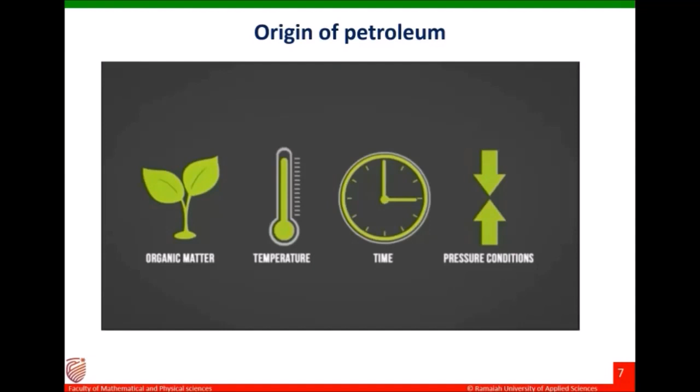There are 3 types of major fossil fuels: coal, oil, and natural gas. Coal is formed from the ferns, plants, and trees which hardened due to pressure and heat. Oil was formed from small organisms like zooplankton and algae, where pressure caused the more complex organic matter to decompose. Natural gas was formed by the same process as oil but was only exposed to more pressure and heat, causing it to further decompose and turn into gaseous form.

At the molecular level, oil and gas are the hydrocarbons made up of hydrogen and carbon atoms. The constant pressure and movement of the Earth's crust squeezes the oil and gas through the pores or spaces within the rocks. Some oil and gas reaches the Earth's surface and seeps out naturally into land or water. Often, it is trapped beneath the surface by impermeable layers of rock structures like rock faults.

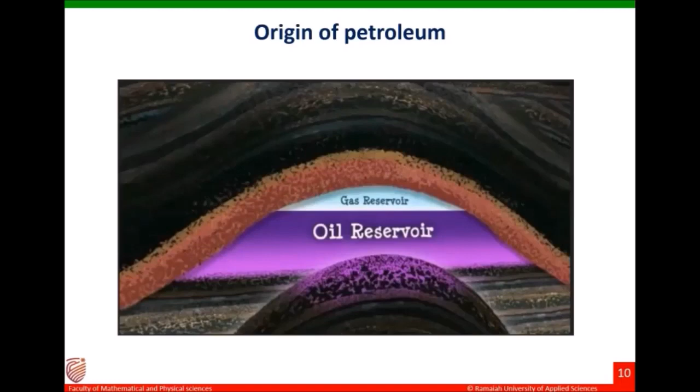Within the crust, oil or gas deposits build up and form reservoirs. Reservoirs are like vast sponges filled with oil and gas. They can be as large as a city. To find oil and gas deposits, geologists use a number of different survey techniques, including seismic surveys, gravitational surveys, and geological mapping. Seismic surveys use reflected sound waves to produce a 3-dimensional view of the Earth's interior.

New technologies such as 4-dimensional projections and sophisticated graphic renderings of rock structures are improving the way we find conventional oil and gas deposits. Energy resources that are currently difficult or expensive to extract are called unconventional oil and gas.

Oil has become the most important source of energy since the mid-1950s and became the lifeblood of the industrialized nations. Its products underpin modern society, mainly supplying energy to power industry, heat homes, and provide fuel for vehicles and aeroplanes to carry goods and people all over the world. In addition, it also benefits our lives in being vital to the production of many everyday essentials.

Oil's refined products are used to manufacture almost all chemical products, such as plastics, fertilizers, detergents, paints, and even medicines, plus a whole host of other products that you might not expect. Petroleum is the raw material for fuels such as petroleum gas, gasoline or petrol, naphtha, kerosene, diesel, fuel oil or heavy oils. Petroleum is also used to make useful petrochemicals such as benzene, toluene, other organic solvents, fertilizers, adhesives, pesticides, plastics, bitumen, petroleum wax, lubricating oil, etc.

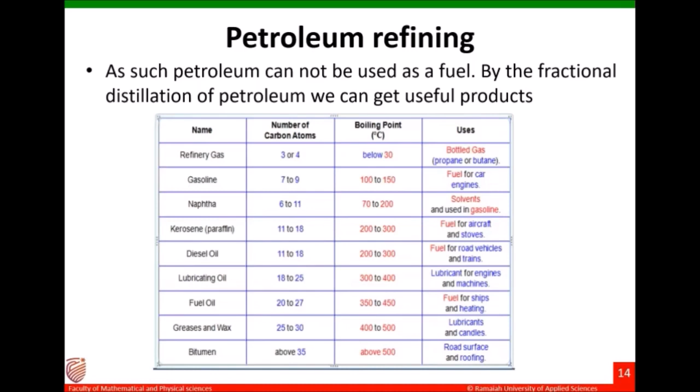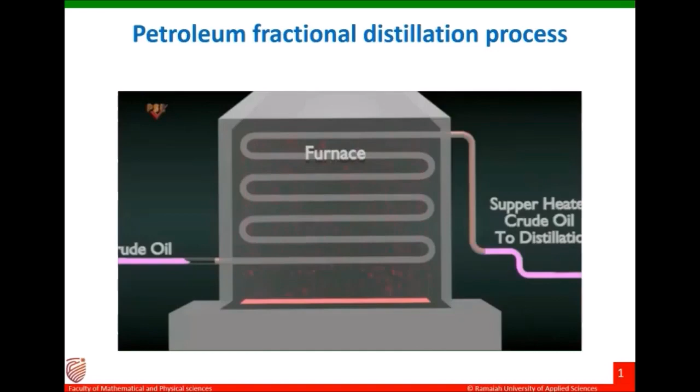To simplify the petroleum distillation process, we consider one distillation tower in which the distillation process takes place. Crude oil is supplied to a furnace where it is heated before adding it into the distillation tower. The heated mixture is fed into the bottom section of the distillation tower. This bottom section is the hottest point in the distillation tower, where the temperature can reach as high as 400 degrees Celsius. Components which are not vaporizable at this temperature become the bottom products.

Components in vapor form rise up the tower through a series of distillation stages. The temperature decreases as the vapors rise through the tower and the components condense. The products obtained from each distillation zone are known as product streams. Products from the distillation range from gases at the top to very highly viscous liquids at the bottom. In all cases, these product streams are considered unfinished products and further processing is required to make them useful products.

Light products separated at the top contain propane, butane and isobutane. This stream is also known as petroleum gas and it can be liquefied to produce liquefied petroleum gas or LPG. The gasoline stream is used as a good fuel for automobiles. The naphtha stream can be converted to gasoline by the reforming process. We will discuss the reforming process in the next video.

Kerosene can be treated to obtain jet fuels. Heavier oils such as fuel oil can be converted into useful fuels by cracking techniques. We will study cracking techniques in the next video. The process depends on the quality of the petroleum as well as market demands. The lower products, asphalt or bitumen, are used for construction.

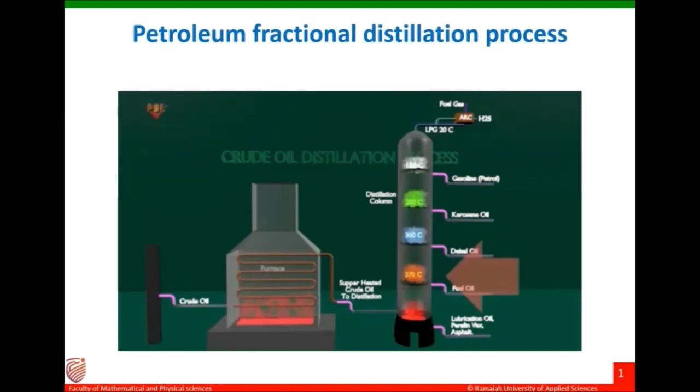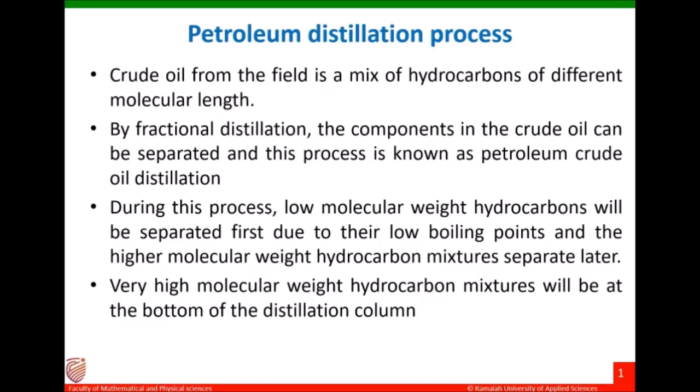Now we will summarize the petroleum distillation process. Crude oil from the field is a mix of hydrocarbons of different molecular lengths. By fractional distillation, the components in the crude oil can be separated, and this process is known as petroleum distillation. During this process, low molecular weight hydrocarbons will be separated first due to their low boiling points, and the higher molecular weight hydrocarbon mixtures separate later. Very high molecular weight hydrocarbon mixtures will be at the bottom of the distillation column.

Now we will summarize the video. In this video, the following questions were answered. How was crude oil formed in Earth's crust? What is the significance of petroleum in the present scenario? What is the composition of petroleum? What is the principle behind the separation of useful products from petroleum? Explain the petroleum distillation process. What are the products obtained from distillation of petroleum?

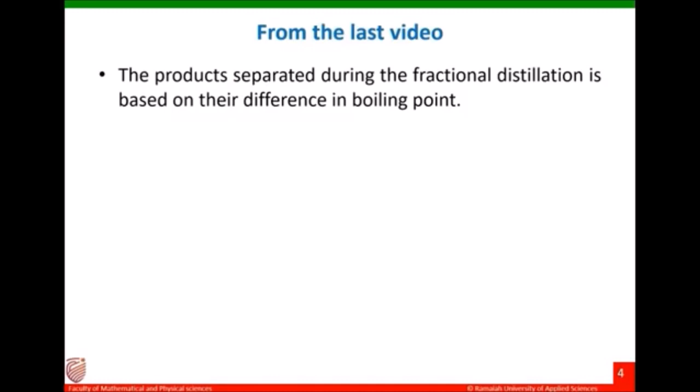The products separated during the fractional distillation process were based on their difference in boiling point. Lower molecular weight hydrocarbon based products separate at a lower temperature, for example refinery gas, petrol, etc. Higher molecular weight hydrocarbon based products are separated at higher temperatures, for example fuel oil, lubricating oil, etc. Very high molecular weight hydrocarbon based products will be at the bottom of the distillation column, and they won't vaporize in the column.

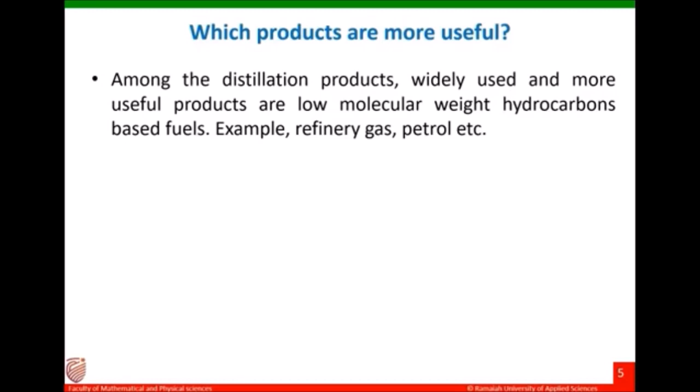For example, waxes, bitumen, etc. Among these fractional distillation products, which products are more useful? Widely used and more useful products are low molecular weight hydrocarbon based fuels, for example refinery gas, petrol, etc. Higher molecular weight hydrocarbon based products such as fuel oil do not have much commercial value. Higher molecular weight oils are also known as heavy oils.

Can we convert these less useful heavy oils into useful products? Yes, and that method is known as cracking of fuel. So the definition of cracking is this. Cracking is the breaking down of molecules with longer hydrocarbon chains into molecules with shorter hydrocarbon chains. This process you can achieve with the help of heat as well as catalyst.

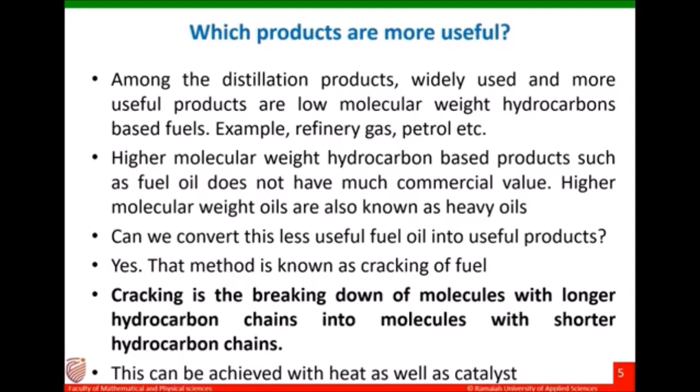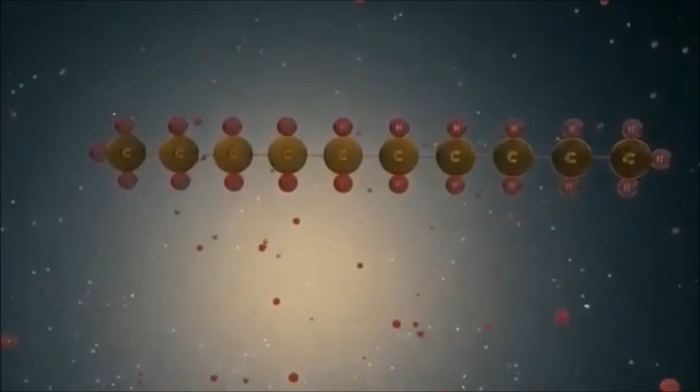The liquid is easily collected and separated by weight. The lighter and medium weight liquids require less processing before they're ready to be used in cars and trucks. The heavier liquids need more processing to become useful. A process called cracking is used to maximize the usefulness of heavy oil. Heavy oil has long strings of carbon and hydrogen molecules. Using a catalyst, these molecules can be broken into smaller chains, transforming the heavy oil into lighter, more valuable fluids.

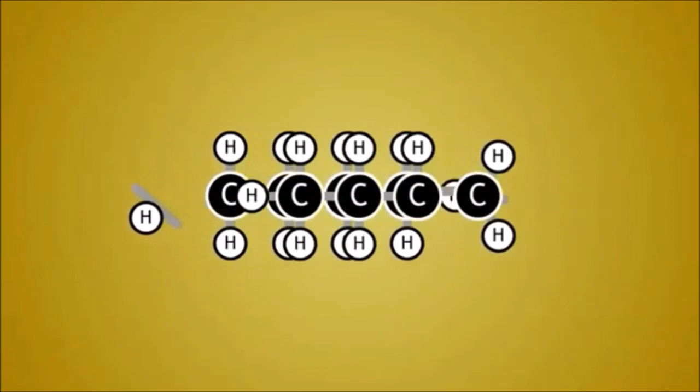We use a lot of fuels in our day-to-day lives, driving cars, aeroplanes, lorries, and even heating our homes. This means there is a very high demand for small-chain hydrocarbons. However, after fractional distillation, we find that we have a large supply of long-chain molecules. The process of cracking breaks down long-chain alkanes into a smaller alkane and alkene molecule.

This allows the supply of short-chain hydrocarbons to meet the demand for them, as the longer-chain alkanes are broken down into shorter alkanes and an alkene. The alkenes are also useful as these can be used in the manufacture of plastics. Here is an equation showing that C12H26 is broken down into octane and butene.

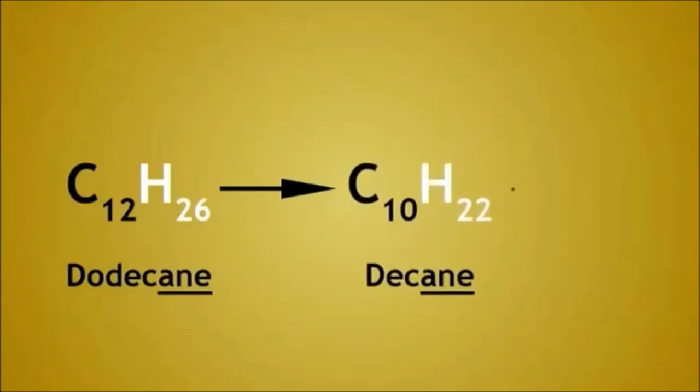There isn't a set way that these molecules are broken down. In fact, C12H26 could also be broken down into decane and ethene, or even butene, pentane and propene, as these equations show. The large hydrocarbon is broken down in quite a random way. Just note that in each equation, of course, since we had 12 carbon atoms and 26 hydrogens going into the reaction, the same must come out.

Types of cracking. Cracking can be done with the help of heat, and that type of cracking is known as thermal cracking. Thermal cracking can be done in two different ways: liquid phase cracking and vapor phase cracking. Cracking can also be done with the help of a catalyst, which is known as catalytic cracking. Catalytic cracking can also be done in two different ways: fixed bed catalytic cracking and fluidized bed catalytic cracking. So cracking can be done in two different ways: thermal cracking and catalytic cracking.

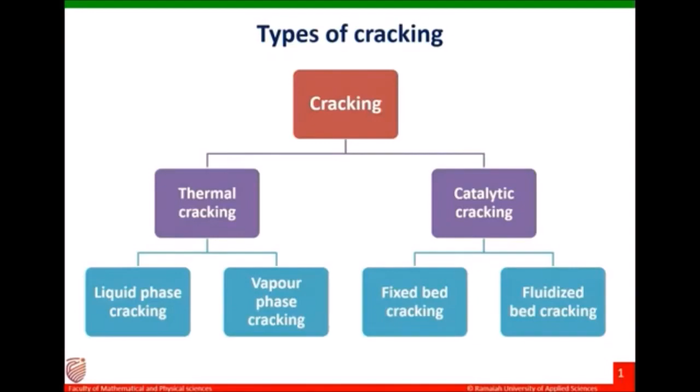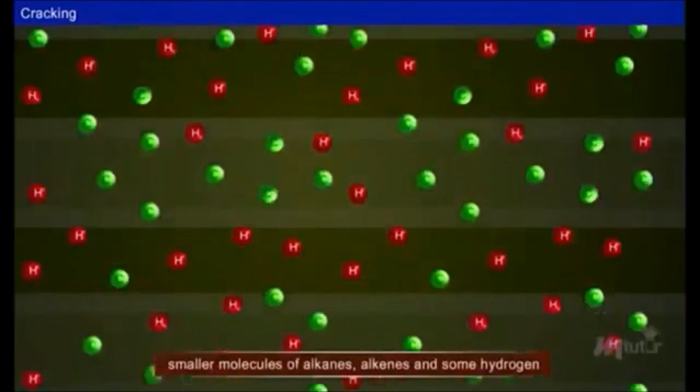There are two methods of cracking in use, thermal cracking and catalytic cracking. Thermal cracking. Cracking that is carried out by the application of heat and pressure is known as thermal cracking. Here, the bigger hydrocarbon molecules break down to give smaller molecules of alkanes, alkenes, and some hydrogen. This process may be carried out either in liquid phase or vapor phase.

Liquid phase thermal cracking. The heavy oil is cracked at a temperature of 475 to 530 degrees Celsius and pressure of about 100 kilograms per square centimeter. The cracked products are then separated in a fractionating column. Vapor phase thermal cracking. This type of cracking is suitable for oils which may be readily vaporized. The crude oil is first vaporized and then cracked at about 600 to 650 degrees Celsius under a low pressure of 10 to 20 kilograms per square centimeter.

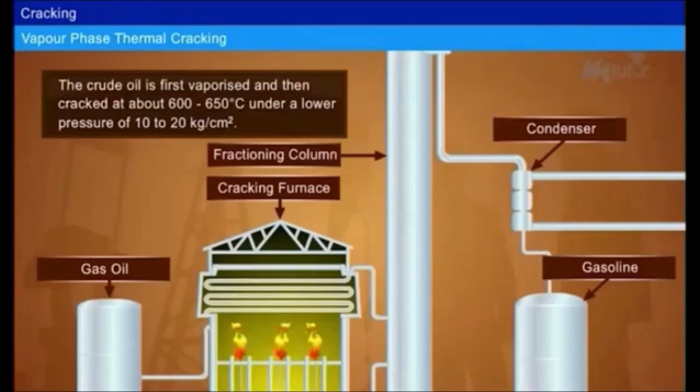Thermal cracking can be done in two ways: liquid phase thermal cracking and vapor phase thermal cracking. In liquid phase thermal cracking, heavy oil is pumped into the coil, kept at 420 to 550 degrees Celsius under a pressure of 15 to 100 kilograms per square centimeter. Here the pressure is quite high. Good quality gasoline is produced at this temperature. Gasoline with low octane value around 60 to 70 is obtained, which can be mixed with a higher octane value gasoline and then be used in automobiles. What is octane number? That we will study in the next video.

Vapor phase thermal cracking. Here the heavy oil is heated in a heater at 400 degrees Celsius to convert it into vapors. Then these vapors are passed into the reaction chamber, which is maintained at a temperature of 600 to 650 degrees Celsius under a pressure of 10 to 20 kilograms per square centimeter. Here you see the pressure is lower than that of liquid phase thermal cracking.

And the kind of petrol that we get is of high quality in vapor phase thermal cracking, where you can get an octane number up to 75 to 80. Catalytic cracking can be done in two ways: fixed bed and fluidized bed.

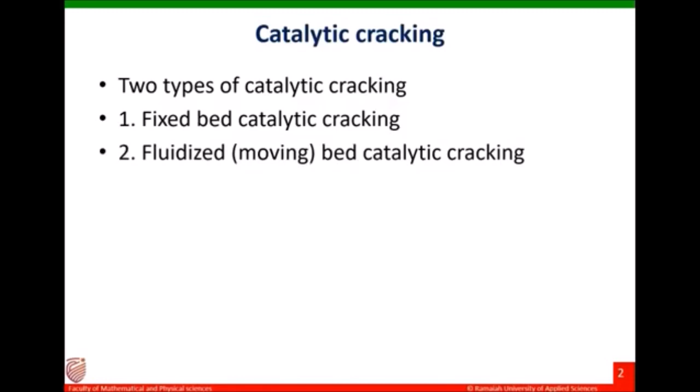In fixed bed catalytic cracking, you can see a catalyst chamber where there are beds where we have to put the catalyst. This catalyst will be fixed in that bed, and we have to pass the heated heavy oil. How can we heat it? With the help of an electric heater. Just heat it, and that heated oil should be passed to the catalyst chamber, where the catalyst molecules will be in touch, or they will be colliding with the heavy oil molecules, and the heavy oil molecules will be converted into lower molecular weight hydrocarbons, and those hydrocarbons we can separate using a small fractional distillation column. So we will get lower molecular weight hydrocarbons.

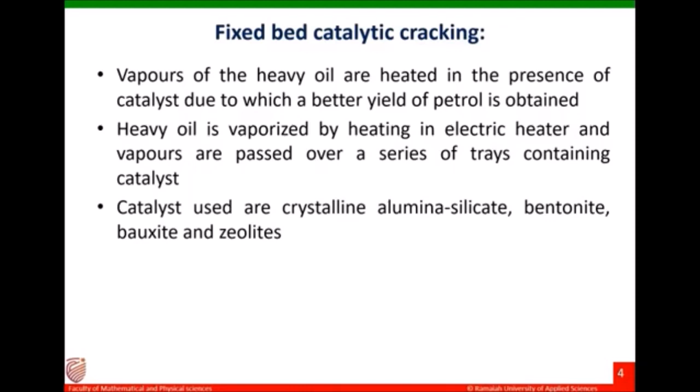So in fixed bed catalytic cracking, vapors of the heavy oil are heated in the presence of catalyst, due to which a better yield of petrol is obtained. Heavy oil is vaporized by heating in electric heater, and vapors are passed over a series of trays containing the catalyst, generally aluminum silicate, bentonite, bauxite, zeolite. And the reaction temperature will be somewhere around 425 to 540 degrees Celsius and a pressure of 1.5 kilogram per centimeter square.

In fluidized bed catalytic cracking, you can see a reaction chamber where catalyst will be suspended or moving with the help of an inert gas. So during this movement, heavy oil molecules will be in collision with the catalyst particles, and the number of collisions will be very high because of the movement of the catalyst. So the heavy oil molecules will be split into lower molecular weight hydrocarbons. These lower molecular weight hydrocarbons you can separate using a small fractional distillation column, where you can get lower molecular weight hydrocarbons separately.

So in the fluidized bed catalytic cracking, we have to supply heavy oil fraction, and the catalyst generally we use is aluminum oxide and silicon dioxide. They should be in finely powdered form. Temperature should be 550 degrees Celsius. Pressure 1 to 2 atmosphere. Time only 3 to 4 seconds. So for this process, the time required is only 3 to 4 seconds. That's why this fluidized bed catalytic cracking is now widely used in industries, mainly in the refineries. The production yield is around 70%.

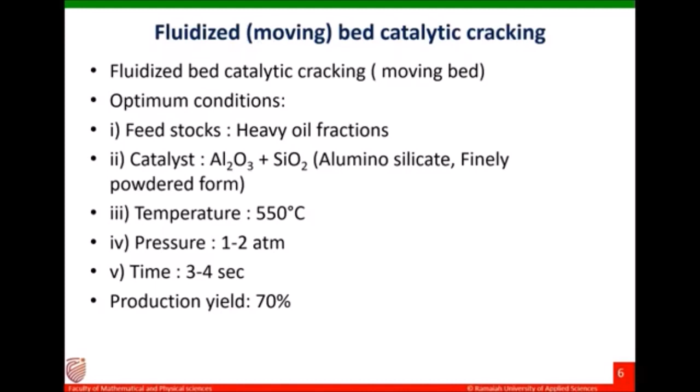So in this video we learned what is cracking, why it is necessary in petroleum industry, types of cracking and their characteristics.

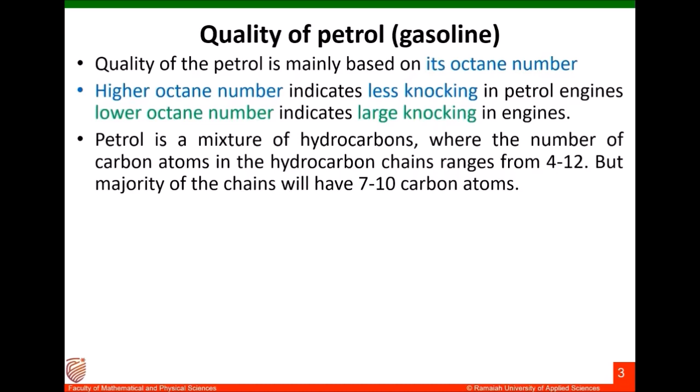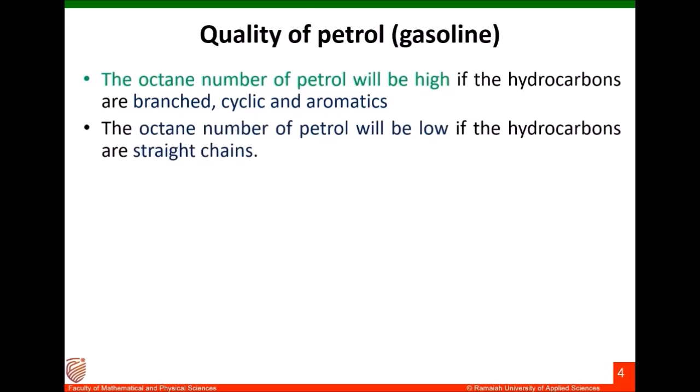The hydrocarbons present in petrol are paraffins or alkanes, olefins or alkenes, cycloalkanes, cycloalkenes, aromatic compounds, etc. Among these hydrocarbons, some compounds will be linear, some will be branched, some will be cyclic and aromatic. If the hydrocarbons in the petrol are majorly branched, cyclic and aromatic, then the octane number of petrol will be high. If the hydrocarbons in the petrol are straight linear chains, then the octane number of petrol will be low.

A significant amount of petroleum products such as naphtha contains mainly straight chain hydrocarbons. Similarly, the petrol obtained from petroleum also contains a significant amount of straight chain hydrocarbons. Straight chain hydrocarbons lead to lower octane number and more knocking. Knocking is a rattling sound in engines. How to increase the octane number? How to decrease the knocking in petrol engines? If we can convert these linear straight hydrocarbons into branched or cyclic hydrocarbons, octane number of the petrol will be increased, and this process is known as reforming process.

Definition of reforming: conversion of straight chain hydrocarbons into branched chain, cyclic and aromatic hydrocarbons, resulting in upgradation of petrol, that is improvement in octane number, is known as reforming. If the reforming is done in the presence of a catalyst, then the reforming is known as catalytic reforming. For example, linear hexane into cyclohexane.

Mainly 4 types of catalytic reforming processes are being used: isomerization reaction, hydrocracking, dehydrogenation reaction, dehydrocyclization reaction. First case, isomerization reaction for reforming. In this given example, the straight chain hydrocarbon, that is n-hexane, in the mixtures of hydrocarbons is converted into its branched isomers such as 2-methylpentane and 2,2-dimethylbutane.

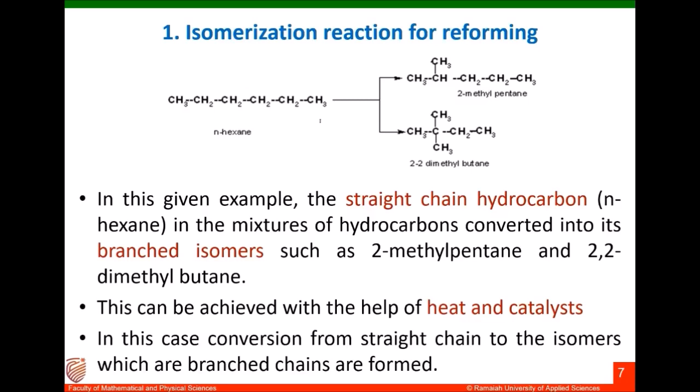Second, hydrocracking reforming. In hydrocracking reforming, in the presence of hydrogen, the straight chain hydrocarbons will be split into smaller hydrocarbons. The word hydrocracking came because of the usage of hydrogen for cracking the longer linear hydrocarbons into shorter hydrocarbons. For example, normal heptane with the help of hydrogen is cracked into smaller hydrocarbons such as propane and butane. Similarly, decane is cracked with the help of hydrogen to produce 2 smaller hydrocarbons of pentane.

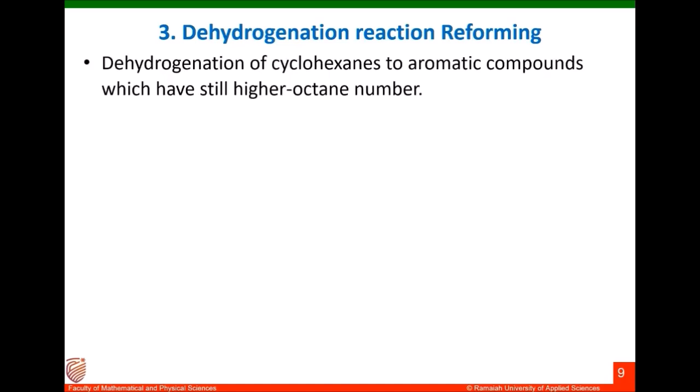The fourth technique, dehydrocyclization reforming process. Straight chain hydrocarbons undergo cyclization followed by dehydrogenation to produce aromatic hydrocarbons. So here 2 processes will be happening. One is dehydrogenation, that means hydrogen will be removed. At the same time, cyclization also will happen, and the product will be aromatic hydrocarbons.

Now we can conclude the reforming process. Reforming process is essential to produce high quality, high octane number petrol from the naphtha stream and low quality gasoline that we obtained from the fractional distillation of crude oil. By converting the straight chain hydrocarbons into branched, cyclic and aromatic hydrocarbons, octane number of fuel will be improved.

If there is something everyone can agree on, it's that cars can make weird noises. It could be a squeal, a clunk, or even a rumble and roar. If the sound is closer to a knock, you may be dealing with problems under the hood. Problems that could cause engine damage if left unresolved.

We know that the combustion of fuel in the engine generates energy for the vehicle. Fuel-air mixture will be compressed and undergo combustion and produce energy. However, at high compression ratios, depending on the composition of the fuel, premature combustion of part of the compressed air-fuel mixture in the cylinder produces intense high frequency pressure waves. These pressure waves force parts of the engine to vibrate, which produces an audible knock.

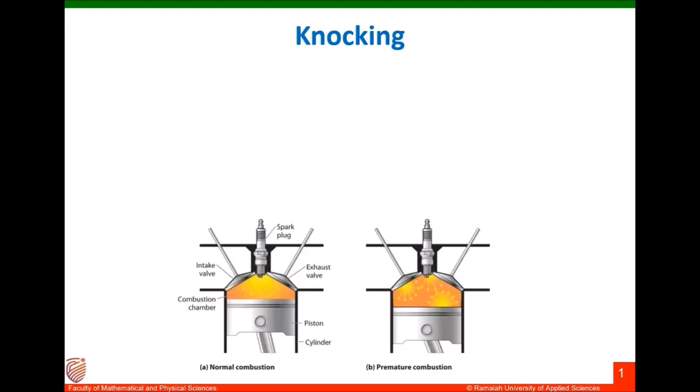Knocking may be defined as the production of a shock wave in an IC engine as a result of an explosive combustion of fuel-air mixture leading to a rattling sound. Knocking is caused by premature combustion of part of the compressed air-fuel mixture in the cylinder. Knocking is mainly due to the faulty spark of the engine, low octane fuel, and carbon deposits in the engine.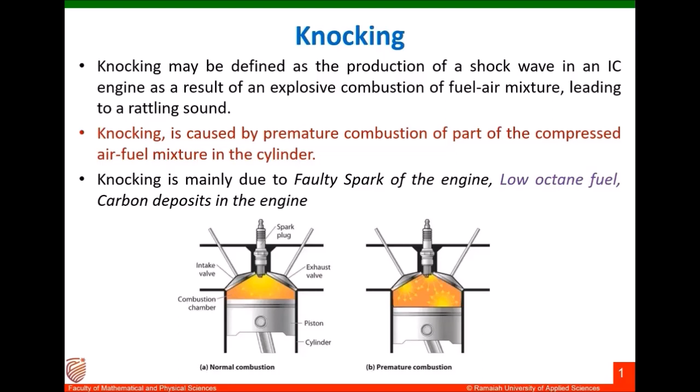Knocking can cause overheating of the spark plug points, erosion of the combustion chamber surface, and rough and inefficient operation. It can be avoided by adjusting certain variables of engine design and operation, such as compression ratio and burning time. But the most common method is to burn gasoline of higher octane number.

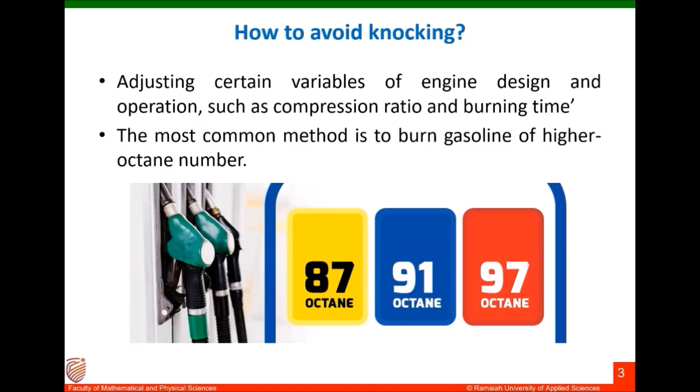When gasoline engines became more powerful in the 1920s, it was discovered that some fuels knocked more readily than others. Knocking occurs when fuel burns unevenly in your engine's cylinders. When cylinders have the correct balance of air and fuel, fuel will burn in small regulated pockets instead of all at once, like sparklers, not like fireworks.

After each pocket burns, it creates a little shock, igniting the next pocket and continuing the cycle. Engine knocking happens when fuel burns unevenly and those shocks go off at the wrong time. The result? An annoying noise and potential damage to your engine's cylinder walls and piston.

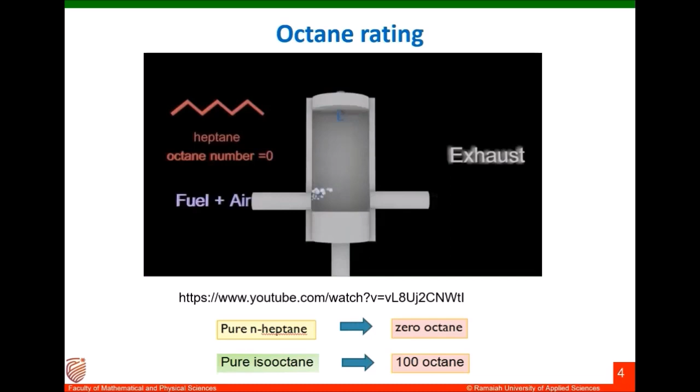Experimental studies led to the determination that of the standard fuels available at the time, the most extreme knock was produced by a fuel composed of pure normal heptane, while the least knock was produced by pure isooctane. Isooctane is 2,2,4-trimethyl pentane. This discovery led to the development of the octane scale for defining gasoline or petrol's quality.

If you use 2,2,4-trimethyl pentane as a fuel, it will create the least knocking. So the octane rating or octane number is 100 for this compound. The highly branched structure makes this compound have less knocking. If you take pure n-heptane as a fuel, it will create maximum knocking due to its linear structure, and therefore the knocking rating or octane number is 0.

Now consider a gasoline fuel sample with an octane number 85. It means that it will produce the same level of knocking as a mixture containing 85% 2,2,4-trimethyl pentane and 15% n-heptane. Similarly, a petrol sample with a 78 octane number indicates that this fuel produces the same level of knocking as a mixture containing 78% 2,2,4-trimethyl pentane and 22% n-heptane.

One important thing to note: a sample petrol having an octane number 80 does not mean that the petrol contains 80% 2,2,4-trimethyl pentane and 20% n-heptane. It only means that the fuel produces the same level of knocking as a mixture of 80% 2,2,4-trimethyl pentane and 20% n-heptane. Reforming is the process to get high quality, high octane number petrol from naphtha distillate and from lower quality petrol. Now we will study the chemistry of knocking.

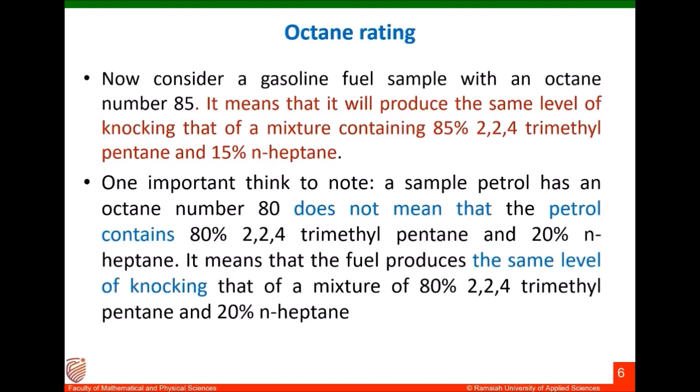Wheeler et al. in 1948 found that knocking is connected with the production of peroxide in the last part of the fuel-air mixture to be burnt. In order to understand this mechanism, we will consider ethane as a fuel. Under normal combustion, ethane will be converted into carbon dioxide and water. The equation is given.

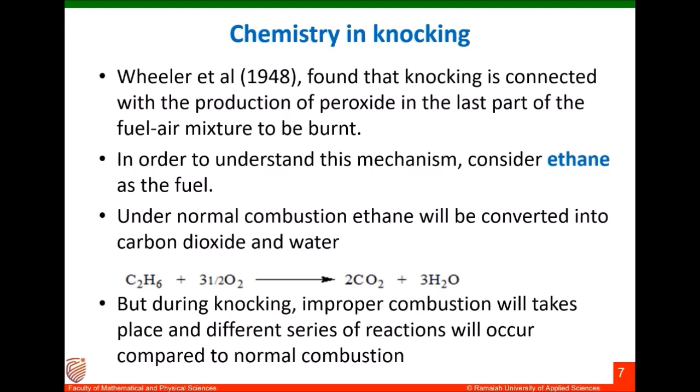But during knocking, instead of this single reaction, improper combustion will take place and a different series of reactions will occur compared to normal combustion. For example, during knocking, the first step will be the conversion of ethane to ethane peroxide. The second step will be the peroxide conversion to acetaldehyde. The third step will be the conversion of acetaldehyde to formaldehyde. And the last step will be formaldehyde into carbon dioxide and water. So this series of reactions will happen during the improper combustion at knocking.

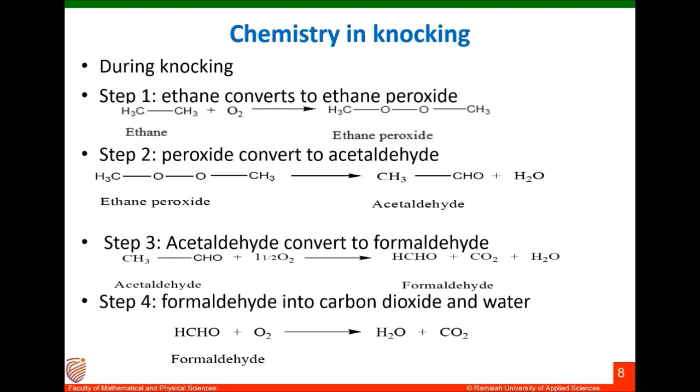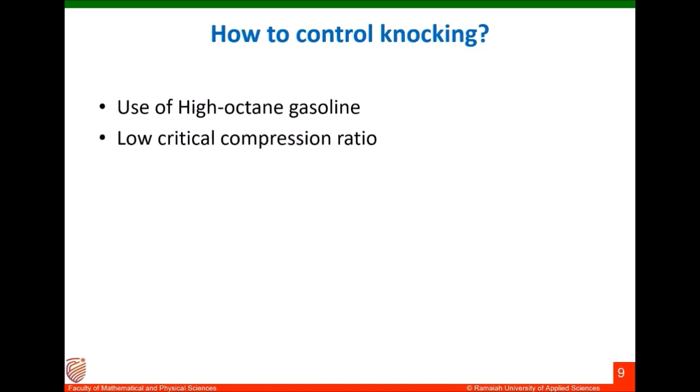How to reduce knocking? We can use high octane gasoline, or we can get a low critical compression ratio, or anti-knocking agents such as tetraethyl lead, tetramethyl lead, methyl tertiary butyl ether, ethyl tertiary butyl ether, amyl alcohol, etc. An anti-knocking agent is a chemical substance added to petrol to improve the anti-knocking property of the petrol.

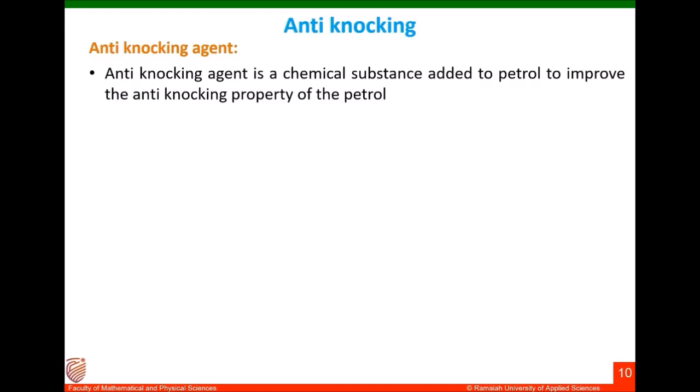For example, tetraethyl lead and tetramethyl lead were used in the 80s and 90s to reduce knocking due to petrol. But now they are phased out because of the poisonous nature of lead. Nowadays, people use methyl tertiary butyl ether, ethyl tertiary butyl ether, tertiary butyl alcohol as anti-knocking agents. A small amount of this anti-knocking agent will be mixed with the petrol and used in petrol engines.

Why are we not using lead-based anti-knocking agents? Reason one is pollution, because it's a toxic metal. Second, the catalytic converter in the vehicle has a rhodium catalyst in it that will be inactivated if lead is present in the exhaust gas.

Next topic is cetane number. Cetane number or cetane rating is an indicator of the combustion speed of diesel fuel and the compression needed for ignition. It plays a similar role for diesel as octane rating does for gasoline. The cetane number is an important factor in determining the quality of diesel fuel, but not the only one. Other measurements such as energy content, density, lubricity, cold flow properties, and sulfur content also determine the quality of diesel fuel in addition to cetane number.

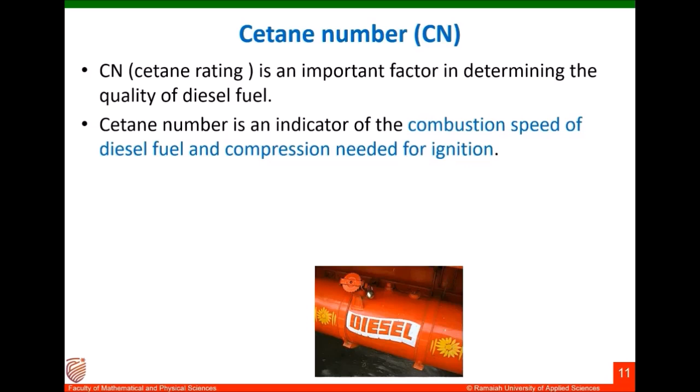Definition of cetane number: cetane number is an inverse function of a fuel's ignition delay. Ignition delay is the time period between the start of the ignition and the first identifiable pressure increase during the combustion of the fuel. In a particular diesel engine, higher cetane fuels will have shorter ignition delay periods than lower cetane fuels.

So, higher cetane number means it will take less time for the ignition, so it will have a shorter ignition delay. If a diesel has a lower cetane number, it will have a longer ignition delay period. Cetane number is the percentage of n-cetane present in the standard mixture of n-cetane and alpha-methyl naphthalene which has the same ignition properties as that of the diesel under examination.

I can tell this statement in a simple way. Generally, a diesel engine operates well within a cetane number of 48 to 50. For example, a sample of diesel fuel having a cetane number of 48 means the ignition property of this diesel fuel will be equal to a mixture of 48% cetane and 52% alpha-methyl naphthalene. Now I think you understood the statement.

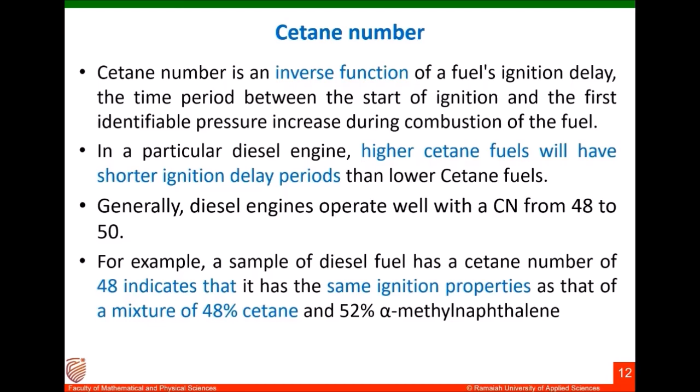Fuels with lower cetane number have longer ignition delays, requiring more time for the fuel combustion process to be completed. Hence, higher speed diesel engines operate more effectively with higher cetane number fuels. So in this video lecture, the following points were discussed: reforming process and its importance, knocking in engines and the reasons behind it, prevention or reduction of knocking, octane number and cetane number for fuels.

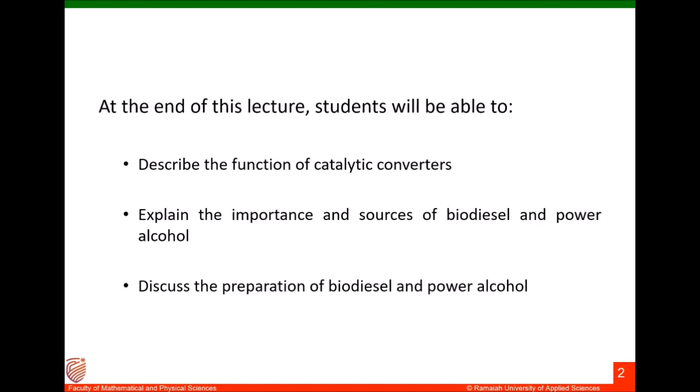Car engines run on gasoline or diesel, which are made from petroleum. In theory, if you burn any kind of hydrocarbon fuel with oxygen from the air, you release a lot of energy and make nothing but carbon dioxide and water, which are clean and relatively harmless. In practice though, gasoline is a mixture of 150 different chemicals, not just hydrocarbons but additives too, and it doesn't burn as cleanly as we would like. That means you generally get some air pollution as a byproduct.

The pollutant gases made by car engines include the poisonous gas carbon monoxide, volatile organic compounds, and nitrogen oxides that cause smog, the sort of choking, cloudy vehicle pollution we all know and hate. How do we avoid releasing these polluting exhaust gases to the environment? The answer is catalytic converters used in vehicles: a device used to reduce the emissions from an internal combustion engine in most modern day automobiles.

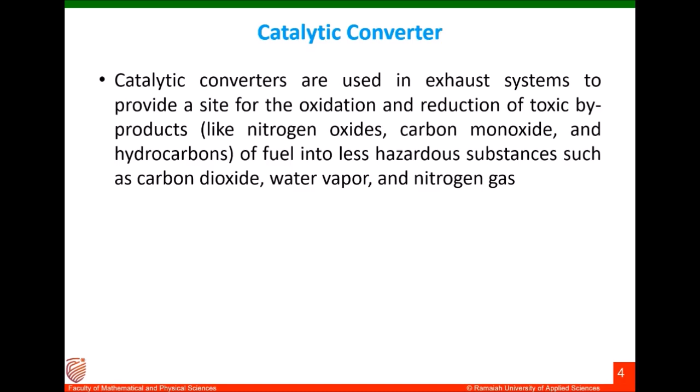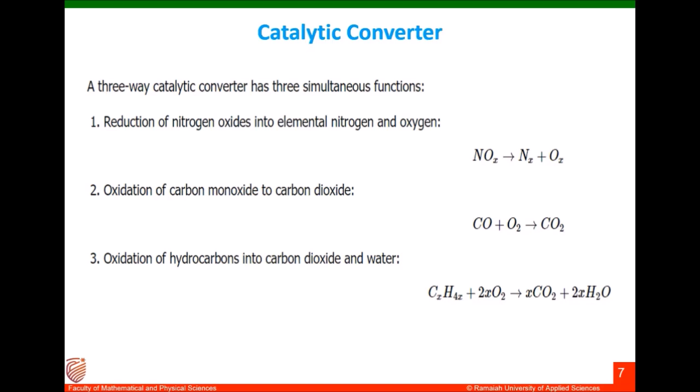A catalytic converter contains a reduction zone with rhodium and platinum catalyst and an oxidation zone with platinum and palladium catalyst. The toxic exhaust gases from the IC engine pass through the catalytic converter and are converted into non-toxic gases. The reactions are shown below. First, reduction of nitrogen oxides into elemental nitrogen and oxygen. Second, oxidation of carbon monoxide to carbon dioxide. Third, oxidation of hydrocarbons into carbon dioxide and water. In these three reactions, there is a conversion from hazardous gases to less hazardous substances.

There are a few limitations for catalytic converters. Higher temperature is required for functioning. It becomes damaged from road fragments. It becomes functionless after 80,000 kilometers. Also, unburned fuel damages the efficiency of the catalytic converter.

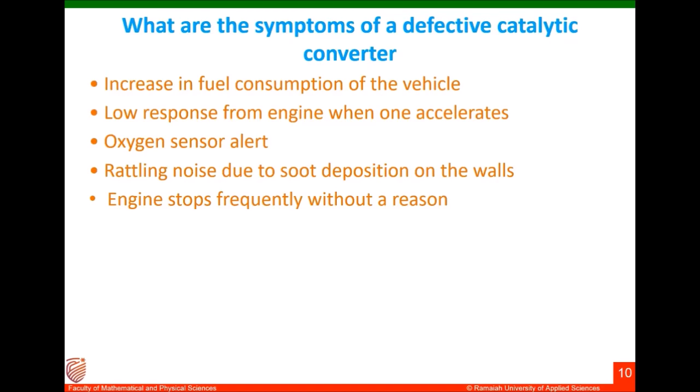How will we know that the catalytic converter is defective? These are the symptoms of a defective catalytic converter: increase in fuel consumption of the vehicle, low response from the engine even when we accelerate, oxygen sensor alert, rattling noise due to soot deposition on the walls, and the engine stopping frequently without a reason. Now, how can we extend the life of catalytic converters? One.

Frequent maintenance of vehicle. Second, reinstallation of the catalyst in the converter after certain kilometers of usage of vehicle. Generally, the palladium catalyst is to be replaced after 80,000 kilometers. Then use unleaded fuel in the vehicle.

As the world human population grows and with changing consumer demands, sustained economic development will depend upon a secure supply of raw materials as inputs for manufacturing needs. The majority of consumer goods are currently made from hydrocarbons produced by the petrochemical industry. Continued depletion of limited global natural resources supports the concept of supplying industrial production and energy needs through the use of renewable or bio-based resources.

A wide variety of industrial products, including biomaterials, fuels, and biochemicals, are already manufactured from bio-based raw materials, which can be divided into 3 broad groups: biomaterials, energy fuels, and biochemicals. Biomass is an attractive energy source for a number of reasons. First, it is renewable as long as it is properly managed.

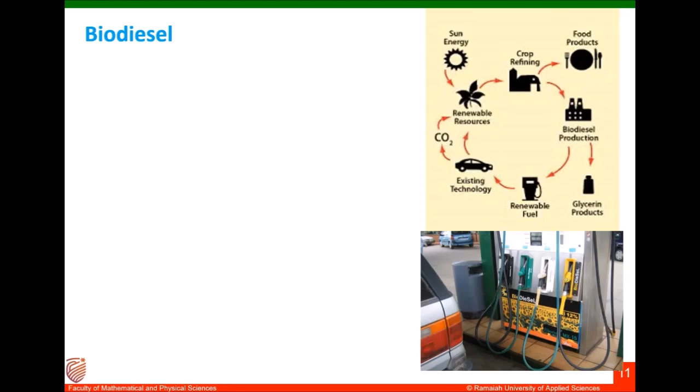Transportation fuels are made from biomass through biochemical or thermochemical processes. Known as biofuels, these include ethanol, methanol, biodiesel, biocrude, and methane. One of the major biofuels is biodiesel. Now we will study the preparation, characteristics, and advantages of biodiesel. Biodiesel is a general name for methyl esters from organic feedstock. So biodiesel, they are methyl esters.

Biodiesel can be made from a wide range of vegetable oils: jatropha plant extract, rapeseed oil, sunflower oil, palm oil, soybean-based oil, recycled cooking oils. These oils can be used to prepare biodiesel. The raw material for biodiesel is mainly vegetable oil and animal fat.

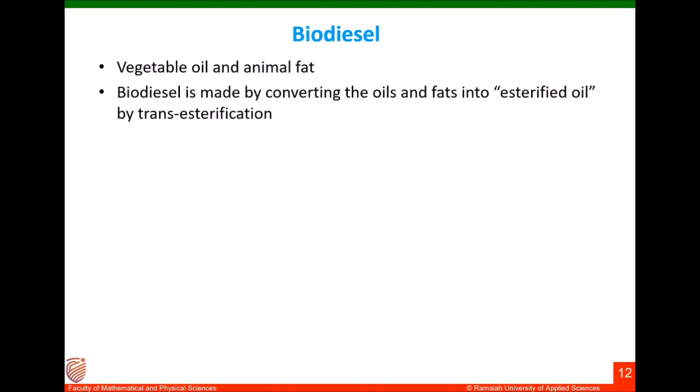Biodiesel is made by converting these oils and fats into esterified oil by transesterification, and the reaction is given in the formula. Oil or fat, when it reacts with alcohol, converts into glycerol and biodiesel. And biodiesel, we can see that they are methyl esters. The mechanism of this reaction is given here.

The vegetable oil is a triglyceride, which is the ester of glycerol. The 3 ester parts, shown in blue color in the vegetable oil, react with 3 methyl groups in the methanol, which is an alcohol, and form 3 methyl esters and glycerol as a byproduct. These 3 methyl esters are known as biodiesel. Generally, sodium hydroxide or potassium hydroxide are used as catalyst for this reaction.

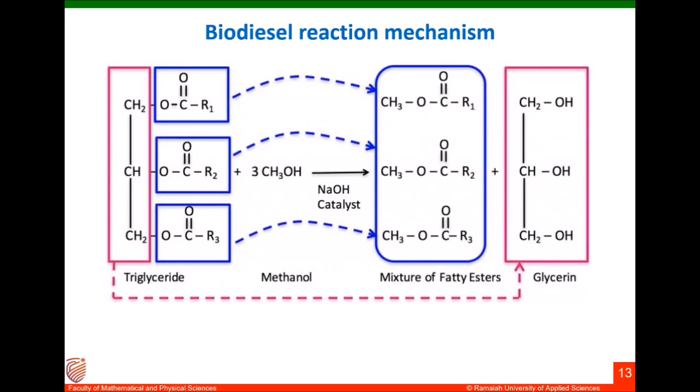The pre-treated oil and fats will be mixed with the methanol and catalyst, and the reaction will continue for a stipulated time at an optimum temperature. After the transesterification reaction, glycerin and biodiesel will be formed and the glycerin can be separated from the reaction mixture. Then the remaining biodiesel should be washed and dried.

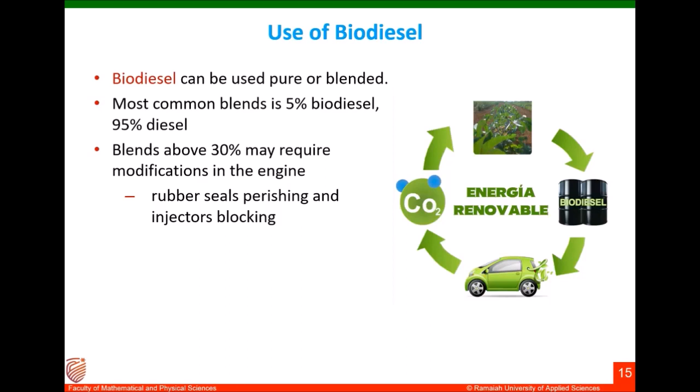Biodiesel can be used pure or in blended form. The most common blend is 5% biodiesel and 95% diesel in vehicles. Blends above 30% may require modifications in the engine, because if you are using more biodiesel than diesel, it leads to rubber seals perishing and injectors blocking in the engine. So if you want to use pure biodiesel in a vehicle, the engine should be modified for the use of biodiesel.

Advantages of biodiesel. Biodiesel is biodegradable, so less harmful if it is spilled. It will degrade itself. It produces lower emissions than petroleum-based diesel. It is a renewable energy resource, with less hydrocarbon, carbon monoxide and particulates released by its combustion. Even though the emission of oxides of nitrogen is higher, we can deal with that using catalytic converters in the vehicle. Use of 100% biodiesel would reduce life cycle carbon dioxide emission by 40 to 50%.

So a 40 to 50% reduction in carbon dioxide emission we can achieve if we are using 100% biodiesel. Use of a 5% blend, that is 5% biodiesel and 95% petroleum-based diesel, will reduce carbon dioxide emission by 2 to 2.5%, and biodiesel is eco-friendly.

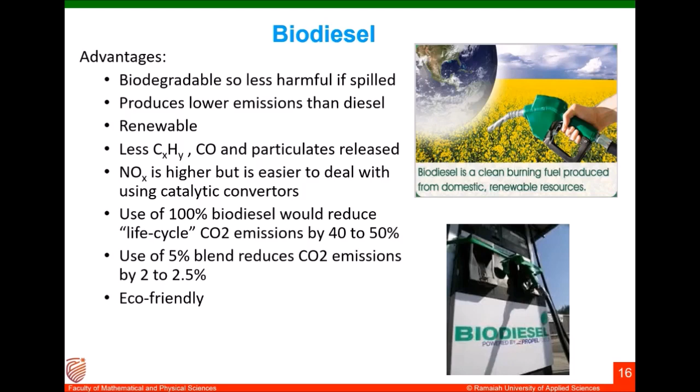Disadvantages. Land requirement for getting vegetable oil from crops, because if you want to get the vegetable oil, we have to cultivate those crops. For that we require land. Emission will occur, and it doesn't address the need to be more energy efficient.

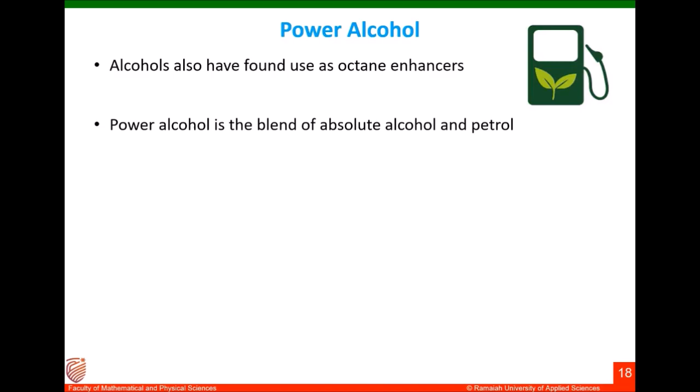These are the disadvantages of biodiesel. Another biofuel is alcohol. Alcohols can be used as octane enhancers for petrol, by blending petrol with absolute alcohol, which means 100% alcohol without any water content. So by blending petrol with absolute alcohol, we can make power alcohol, which can be used in vehicles.

Power alcohol is a mixture of 80% petrol, 20% ethanol and a small amount of benzene. Oxygen present in the alcohol aids in complete combustion of the hydrocarbons in petrol, thereby reducing the peroxide formation, and hence knocking is reduced. We studied about knocking in my previous video lecture. Alcohol can be prepared from corn, molasses, etc.

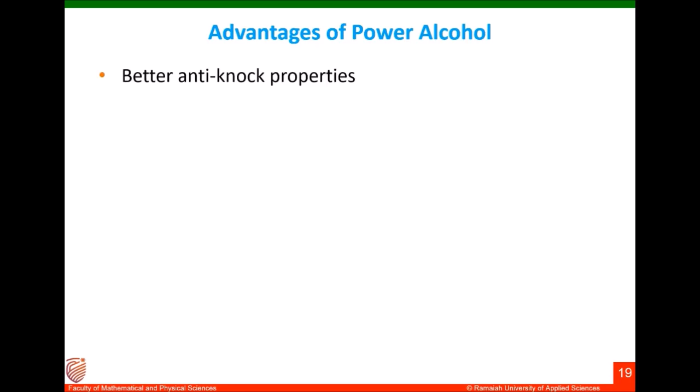Now, advantages of power alcohol. Power alcohol has better anti-knocking property, higher octane number. Alcohol blended petrol can be used in engines with a higher compression ratio. No starting difficulty with alcohol petrol blend in vehicles. Air required for complete combustion is less in power alcohol powered engines.

Ethyl alcohol contains oxygen atoms, which help in the complete combustion of power alcohol, thereby reducing carbon monoxide and volatile organic compound emissions, and it is economically cheaper. But there are some disadvantages of power alcohol. Alcohol lowers the calorific value of petrol, and there is difficulty in starting the engine at lower temperature. At lower temperature you will face difficulty to start the engine of the vehicle.

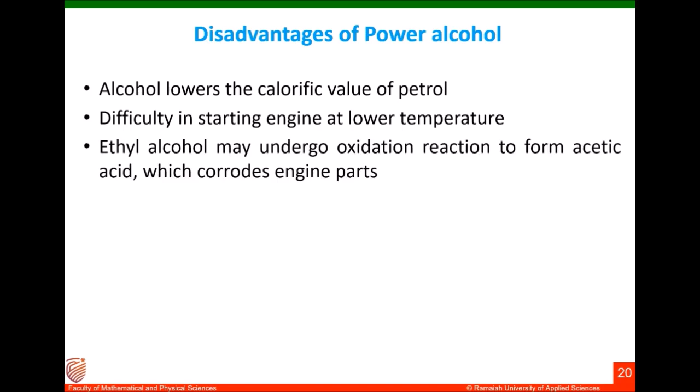Ethyl alcohol may undergo oxidation reaction to form acetic acid, which corrodes the engine parts. That is a concern. Ethyl alcohol contains oxygen atoms, so the amount of air required for complete combustion is less, and therefore air regulation is required. Blending agents such as benzene or toluene are used, which is not good. And here there are a few quiz questions you can answer yourself.

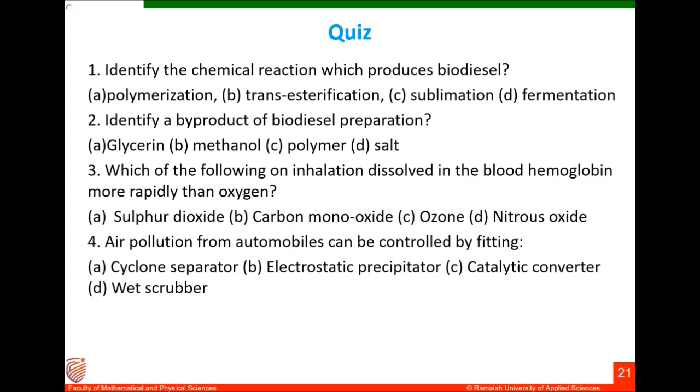Now we will summarize this video lecture. We studied the function of catalytic converters. They are devices used to reduce the emission from the internal combustion engine. Then we studied biodiesel. It is biodegradable, renewable, less harmful if spilled, and produces lower emission than diesel. And we studied the preparation, characteristics and advantages of biodiesel.

Then we studied power alcohol, which has better anti-knocking properties, higher octane number, and the alcohol blended petrol, that is power alcohol, can be used in engines with a higher compression ratio.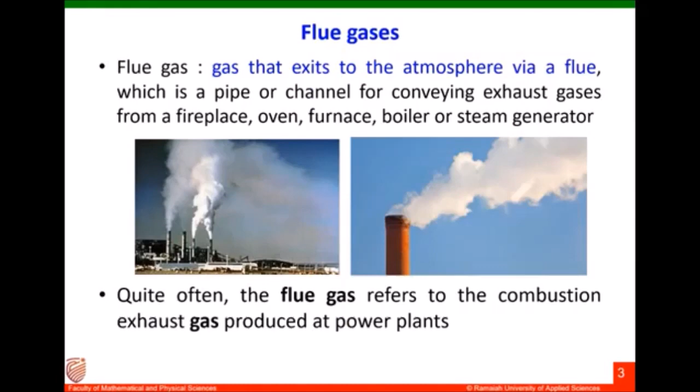Quite often, flue gas refers to the combustion exhaust gas produced at power plants, especially thermal power plants. So the combustion product or exhaust gas coming out from the power plants is known as flue gas. Flue gas composition depends on what is being burned, but it will usually consist mostly of nitrogen. Typically more than 2/3 of the flue gas will be nitrogen, derived from the combustion air, along with carbon dioxide, water vapor, as well as excess oxygen, which is also derived from the combustion air.

It further contains a small percentage of a number of pollutants such as particulate matter like soot, carbon monoxide, nitrogen oxides, and sulfur oxides. So the major components in flue gases are nitrogen, excess oxygen, carbon dioxide, soot, carbon monoxide, nitrogen oxides, and sulfur oxides.

Most fossil fuels are combusted with ambient air. We don't use pure oxygen. We normally burn the fossil fuel in ambient air for generating power. Since ambient air contains about 79 volume percent gaseous nitrogen, which is essentially non-combustible, the largest part of the flue gas from most fossil fuel combustion is uncombusted nitrogen.

So why is 2/3 nitrogen? Because the ambient air that is used for the combustion of the fossil fuel mainly contains nitrogen. So the non-combustible nitrogen will be the major part of the flue gas. Carbon dioxide, the next largest part of flue gas, can be as much as 10 to 25 volume percent or more of the flue gas. Around 10 to 25% of the flue gas will consist of carbon dioxide.

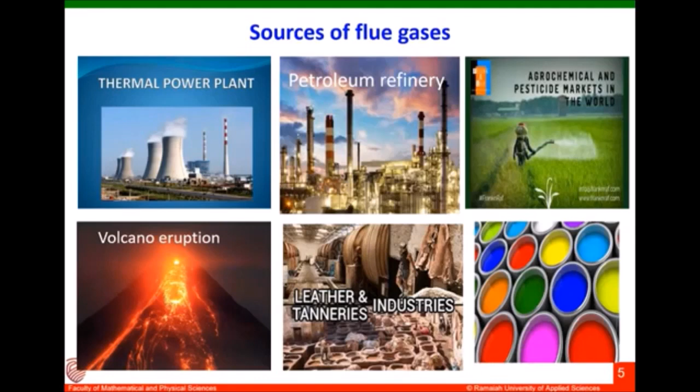One of the effects of flue gases in the atmosphere is acid rain. Acid rain results when sulfur oxides and nitrogen oxides are emitted into the atmosphere and transported by wind and air currents. The sulfur oxides and nitrogen oxides react with water, oxygen and other chemicals to form sulfuric acid and nitric acid. Then these acids mix with water and other materials before falling to the ground, especially during the time of rain.

While a small portion of the sulfur dioxide and oxides of nitrogen that cause acid rain is from natural sources such as volcanoes, most of the time acid rain is due to the burning of fossil fuels. The major sources of oxides of sulfur and oxides of nitrogen in the atmosphere which cause acid rain are the burning of fossil fuel to generate electricity; 2/3 of sulfur dioxide and 1/4 of oxides of nitrogen in the atmosphere come from electric power generators.

Sulfur dioxide and oxides of nitrogen are also produced from vehicles and heavy equipment, and from manufacturing industries, oil refineries and other industries. So after the production of sulfur dioxide and oxides of nitrogen from these industries, the winds can blow them over long distances and across borders, making acid rain a problem for everyone and not just those people who live close to those sources.

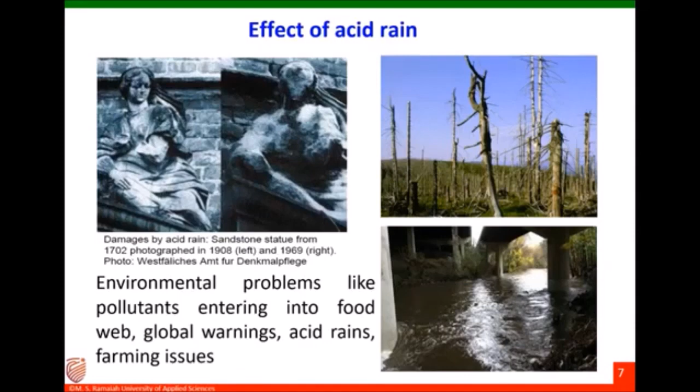We will concentrate on sulfur dioxide as a flue gas in the coming few minutes. Fossil fuels such as coal and oil contain a significant amount of sulfur. When fossil fuel is burned, about 95% of the sulfur is converted into sulfur dioxide. A high gas temperature of 800 degrees Celsius favors the conversion of sulfur dioxide to sulfur trioxide, because the fuel may contain some metals which can act as a catalyst for this reaction.

So at high temperature and in the presence of metals in the fuel, the sulfur dioxide will be further oxidized to form sulfur trioxide. And in whatever way sulfur trioxide is formed, it does not behave like sulfur dioxide.

Sulfur trioxide forms a liquid aerosol known as sulfuric acid mist that is very difficult to remove. Sulfuric acid mist often causes the blue haze that appears as the flue gas plume dissipates. This problem is being addressed by the use of wet electrostatic precipitators that we will study later.

Then how can we avoid or limit sulfur dioxide emissions? The principal approaches to controlling sulfur dioxide or sulfur trioxide emissions include use of low sulfur fuel. So if you use fuel which contains a very low amount of sulfur, then the amount of sulfur dioxide produced after the combustion will be less.

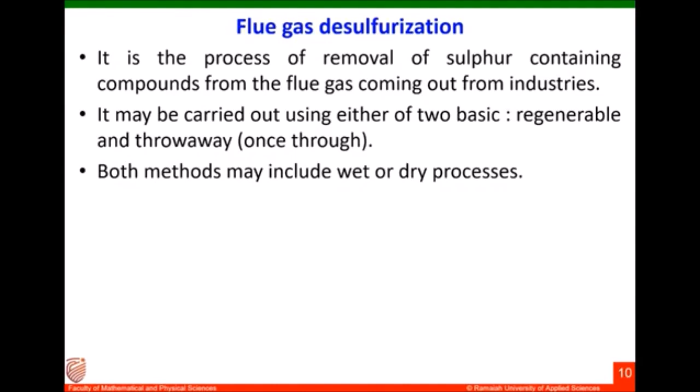Flue gas desulfurization is the process of removal of sulfur containing compounds from the flue gas coming out from industries. It may be carried out using either of two basic flue gas desulfurization systems, regenerable and throwaway. Regenerable means you will be able to recover the sulfur and use it for other purposes, or you can just remove the sulfur containing compounds from the flue gases. Both methods may include wet or dry processes, depending on whether the process needs water or not.

Currently, more than 90% of utility flue gas desulfurization systems use a wet throwaway process, because throwaway systems use inexpensive scrubbing mediums that are cheaper to replace than to regenerate. So regenerating techniques are much costlier, but throwaway wet scrubbing systems are easier to perform and cheaper.

Regenerable systems use expensive sorbents that are recovered by stripping sulfur oxides from the scrubbing medium. We will study these techniques in detail later. These produce useful byproducts including sulfur, sulfuric acid and gypsum. For example, if you can remove the sulfur and sulfuric acid from the flue gas and utilize it, then you can get some money out of the flue gases.

Regenerable flue gas desulfurization systems generally have higher capital cost than throwaway systems, but lower waste disposal requirements and cost. So throwaway systems are cheap, but you will not be able to get money out of them.

But if you invest a huge amount of money and install a regenerable flue gas desulfurization technique, even though the initial cost will be higher and the sorbents are costlier, you will be able to recover the sulfur oxides and utilize them for making sulfuric acid and other products.

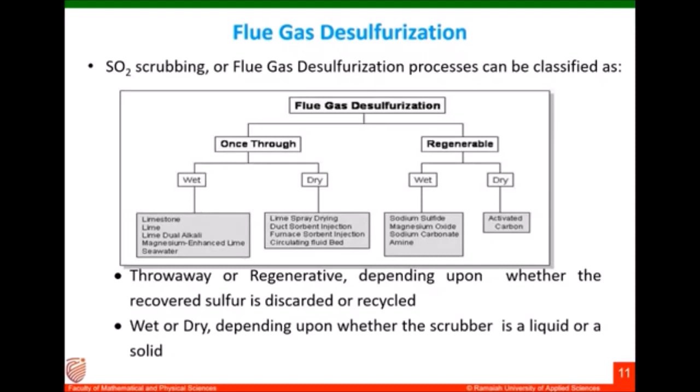Flue gas desulfurization techniques can be categorized as in this chart, and we will study each technique in detail. The major flue gas desulfurization processes are limestone scrubbing, lime scrubbing, dual alkali processes, lime spray drying, and the Wellman-Lord process. First we will study limestone scrubbing. It is a once-through process.

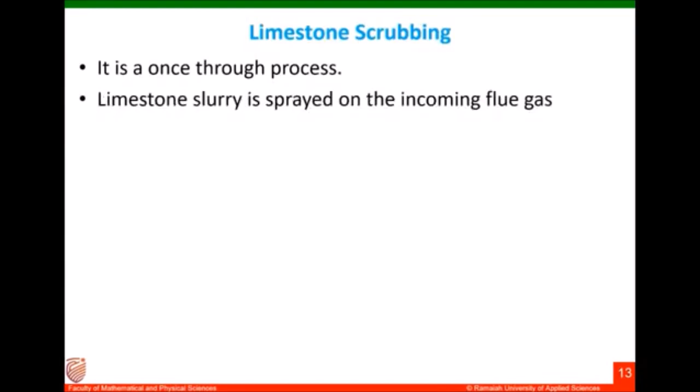Limestone slurry is sprayed on the incoming flue gas. So the sulfur dioxide in the flue gas gets absorbed, and in the reaction the limestone, calcium carbonate, absorbs the sulfur dioxide and forms calcium sulfite. This calcium sulfite can be used to prepare gypsum.

The second technique is lime scrubbing. Lime scrubbing is a wet once-through process. Here, lime, which is calcium oxide, is mixed with water to form calcium hydroxide. Then this calcium hydroxide reacts with the sulfur dioxide in the flue gas and forms calcium sulfite.

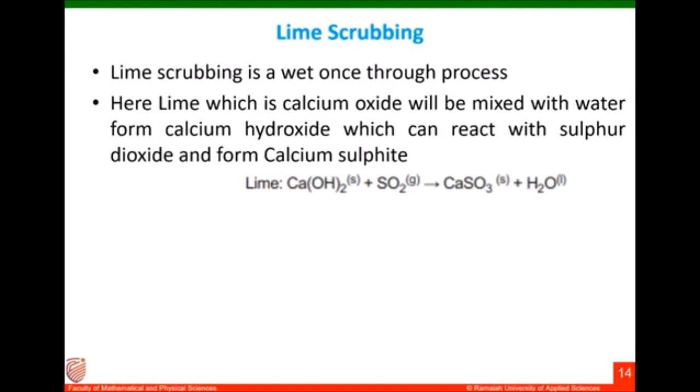So the equation is calcium hydroxide plus sulfur dioxide gives calcium sulfite. This calcium sulfite can also be used to prepare gypsum. Now, what are the major disadvantages of these two methods, limestone scrubbing and lime scrubbing?

Lime and limestone scrubbing lead to deposits inside the tower. That means the final product is calcium sulfite. So this calcium sulfite deposit may block the nozzles through which the scrubbing slurry is sprayed. So normally in limestone and lime scrubbing, we are spraying a slurry. That nozzle will be blocked because of the deposits of the product calcium sulfite.

Compared to limestone scrubbing, lime scrubbing is expensive because the cost of calcium oxide is much higher than that of calcium carbonate. Third technique is dual alkali system. Dual alkali system uses two reagents, sodium sulfite and sodium hydroxide, inside the spray chamber to remove the sulfur dioxide. Resulting products will be sodium salts. Calcium sulfite and calcium sulfate are precipitated, and we can regenerate sodium hydroxide.

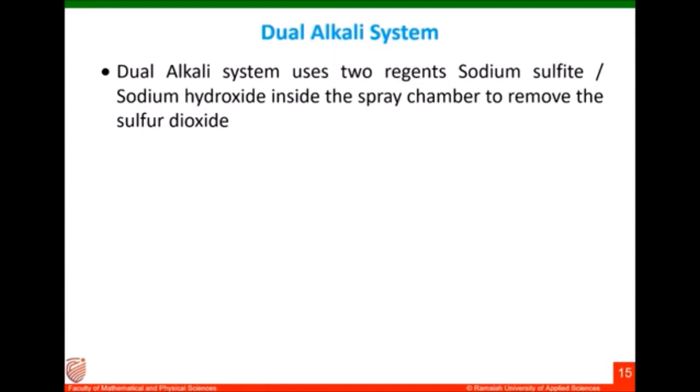So here one of the reactants that we put to remove sulfur dioxide, that is sodium hydroxide, we will get it back. But whatever sodium sulfite we are supplying, we will not get it back. The system has zero liquid discharge and eliminates the need for a wastewater discharge permit. So this process actually will not produce any wastewater as the byproduct. So this system has zero liquid discharge and we don't require any wastewater treatment plant.

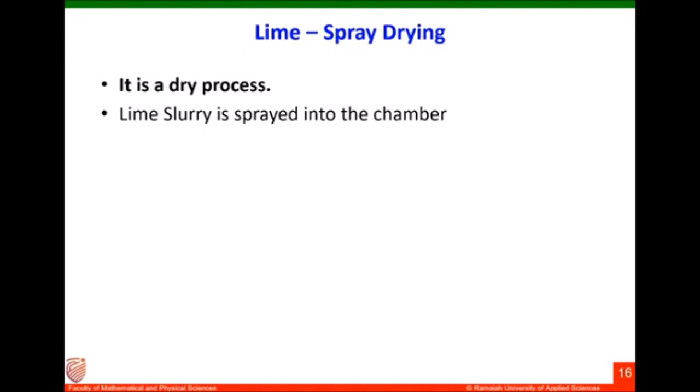Fourth technique is lime spray drying. Here it is a dry process, unlike lime scrubbing and limestone scrubbing. Lime slurry is sprayed into the chamber. Then sulfur dioxide in the flue gas is absorbed by the slurry. But here the liquid to gas ratio is maintained such that the spray dries before it reaches the bottom of the chamber. So from the top, you supply the lime slurry through a nozzle, and the liquid to gas ratio is maintained such that the spray dries before it reaches the bottom of the chamber.

That means after the absorption of sulfur dioxide, the lime slurry will come down to the bottom of the chamber, but when it reaches the bottom, the water content will not be there. So the final product at the bottom of the chamber will be a solid product. These dry solids are carried out with the gases and are collected in a fabric filtration unit. The system needs lower maintenance, lower capital cost and lower energy usage. So the final product, sulfur dioxide absorbed in the lime slurry, we have to filter using a fabric filtration unit because it is a powder kind of material.

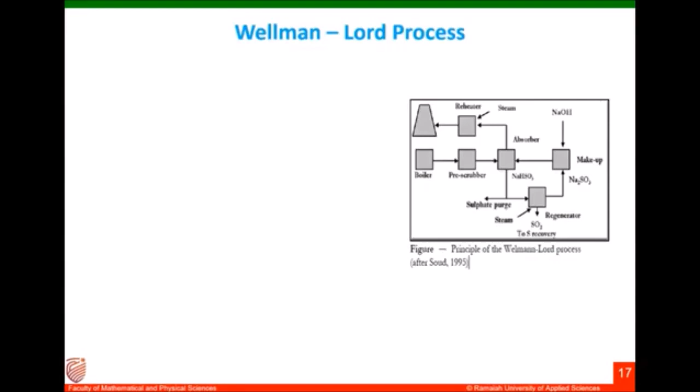Fifth process is the Wellman-Lord process. The Wellman-Lord process is a regenerable process. All other processes were once-through processes. That means we can get the sulfur dioxide back after removing it from flue gases and use it for other purposes. It is a flue gas desulfurization process without creating a throwaway sludge product. So it will not create any product like gypsum or calcium sulfite. Rather, we will be able to recollect the sulfur dioxide and the reagent can be reused again.

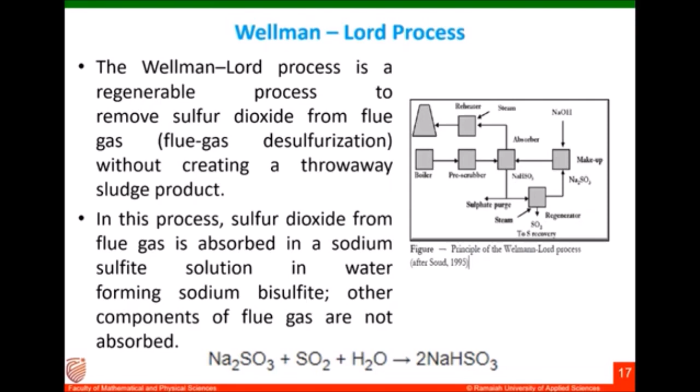Now get that precipitate. Then upon heating, the two previously described chemical reactions are reversed and sodium pyrosulfite is converted to a concentrated stream of sulfur dioxide and sodium sulfite. So here you can see sodium pyrosulfite will be decomposed to sodium bisulfite. Then again that sodium bisulfite will be decomposed and you will get the sulfur dioxide back. So from the flue gas you will be able to separate the sulfur dioxide.

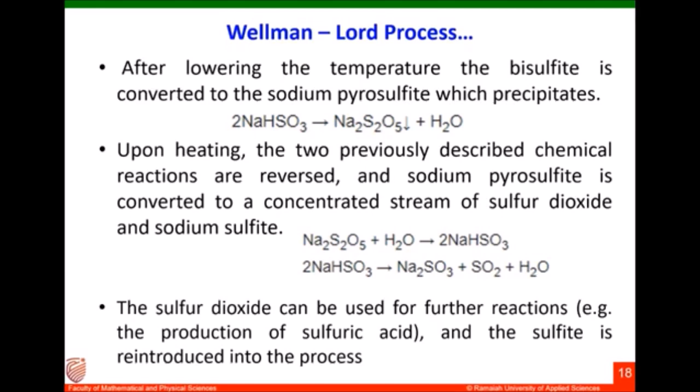This sulfur dioxide can be used for further reaction, that is for the production of sulfuric acid. Sulfur dioxide is the major reactant for producing sulfuric acid. And sodium sulfite, you will get it back. So again you can use the sodium sulfite for the Wellman-Lord process. So you will not be losing any reactants for removing the sulfur dioxide from the flue gas.